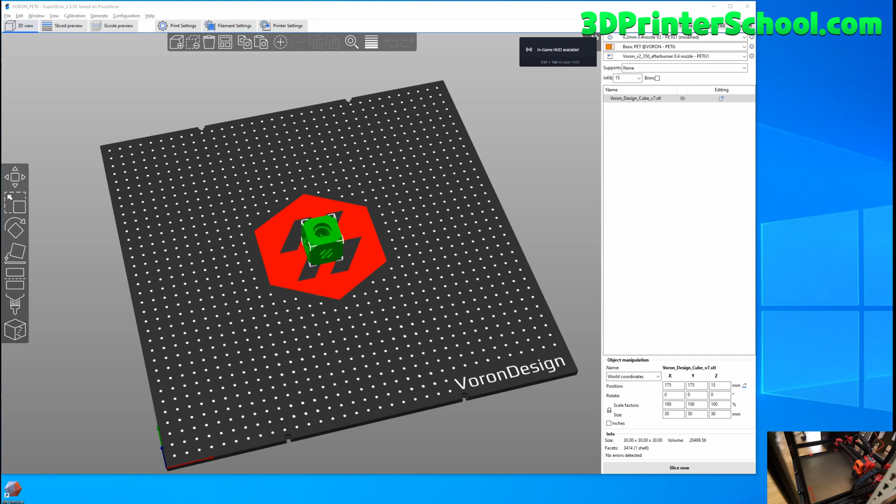Hi guys, so we're going to go ahead and print our very first object. We're going to do the Voron Test Cube here. I'm going to be using PETG for this.

Let me go ahead and share some of my settings. I did share with you guys my Printer.cfg settings. Let me go find my printer. I've switched to a new office, so my IP address has changed. This is the local IP address, by the way. I can also access it using Voron2.local. My router at this new office supports that, but maybe it's not working. It's okay, it doesn't matter.

So I've got Mainsail up. Last time I showed you how to set up Printer.cfg. Now this is just my method. I'm not saying it's the best out there that you can follow on the internet, but I've just been putting pieces together myself and it's been working for me. Let me go over some of the stuff.

So your serial, this is how you connect to your board. These are extra temperature sensors I added, Raspberry Pi, Octopus, and then the enclosure section, so you can comment the enclosure part out if you don't use an enclosure.

Core XY, 300 max velocity. I would recommend setting this lower if this is your first time. I get pretty good results at 8,000 and 4,000. I'm not trying to break the world record for the fastest Voron. Things move fast and they're eventually going to break down, so I don't run it that fast. I run it just at medium speeds for right now.

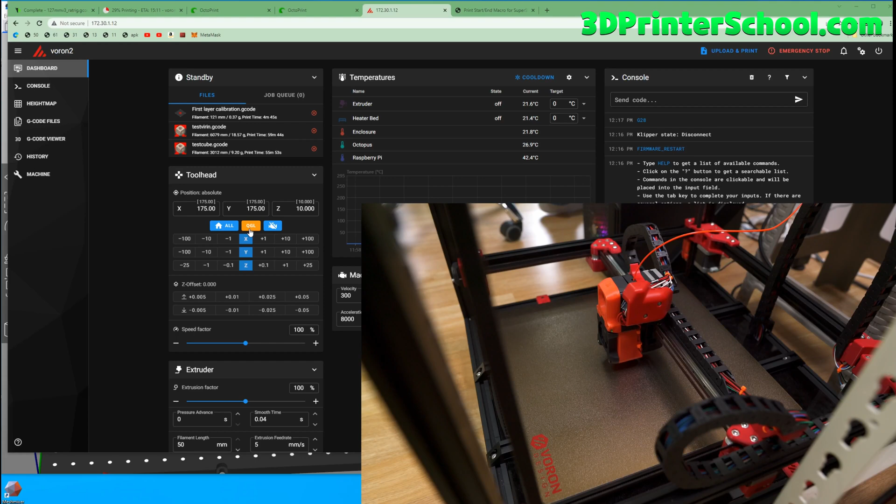Let's home it real quick, and let's do quad gantry level real quick. Now make sure your nozzle is clean—we're going to do first layer calibration, layer height.

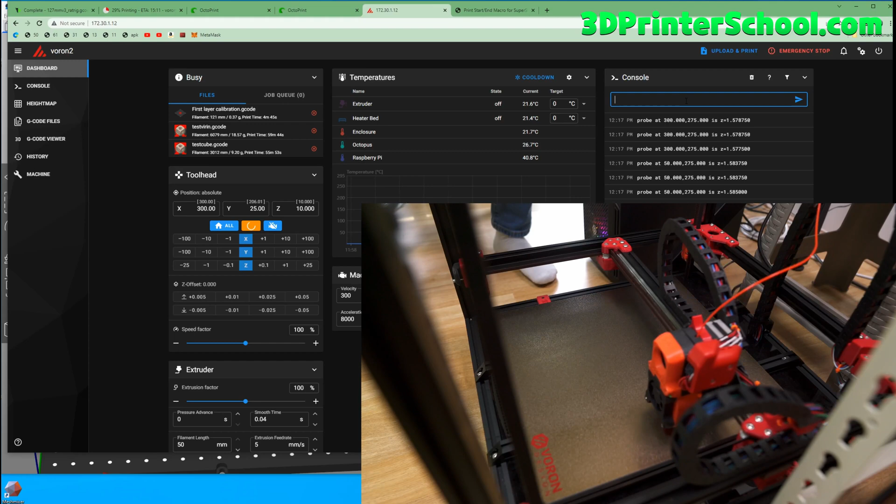The command is going to be probe_calibrate. I'm going to go ahead and check my machine here and make sure there's a little bit of nozzle residue. When you do the first layer probe calibration, you want to make sure there's nothing there. You don't really have to do quad gantry level, but I guess it's better to do it.

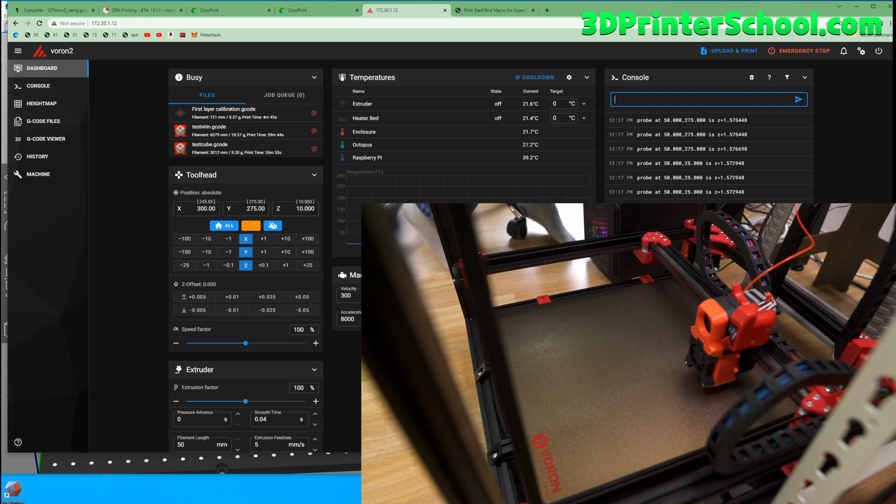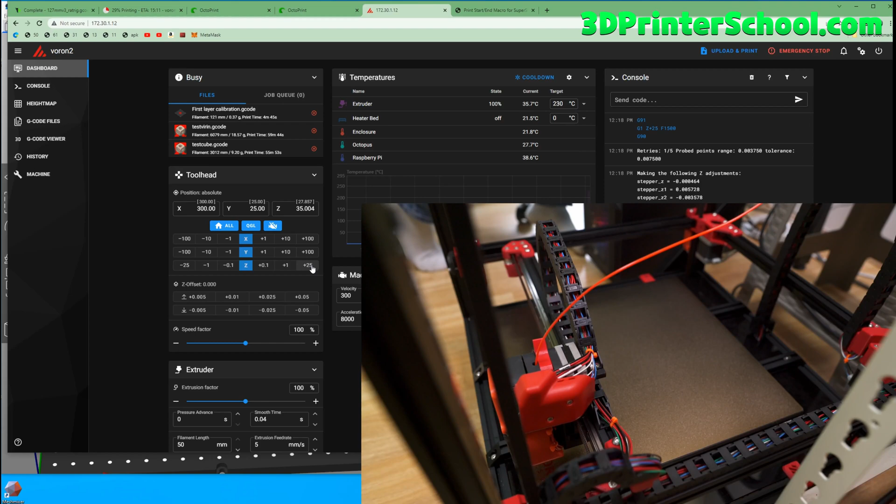Okay, as it heats up, I'm going to go ahead and remove some of this stuff—remove the extra filament. As soon as I remove it, another important thing, I'm going to bring the temperature back down to 150. That way there's nothing coming out. Make sure your nozzle is clean, otherwise your first layer calibration is going to be off.

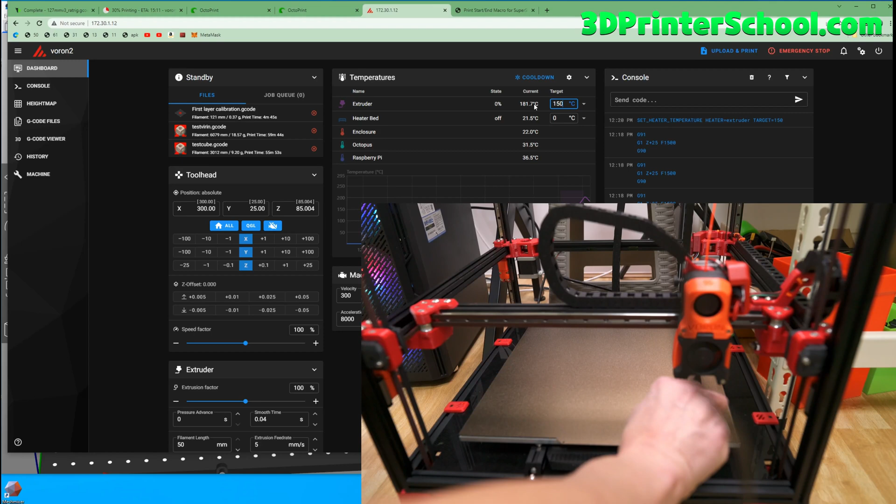So while it's cooling down, I'm going to go ahead and take my pliers and remove that extra filament. I didn't have to reach full 230 degrees—it is completely clean now. We're going to center it again.

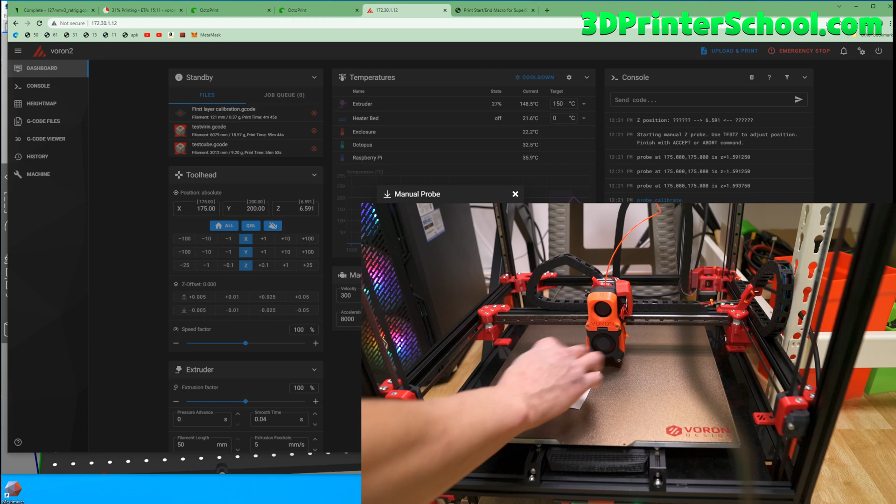You can do this cold—Klipper will actually adjust automatically for it. So once you center it, you're going to do probe_calibrate, and this is going to set it about 5 millimeters above the bed, bringing up this little adjustment prompt. What you're going to do is put a piece of paper under it. Just watch it carefully, it's like about 5 millimeters—keep watching the nozzle and make sure it doesn't hit the bed.

I'm going to go down: -1, 2, 3, 4, 5. Okay, now -0.5: 1, 2, 3—no, it's got to go further, 1, 2, 3, 2, 1. Oh, almost there, 1 more. Okay, it's getting there, I'm going to go a little bit slower—get it until it gets stuck, slightly stuck. Yep.

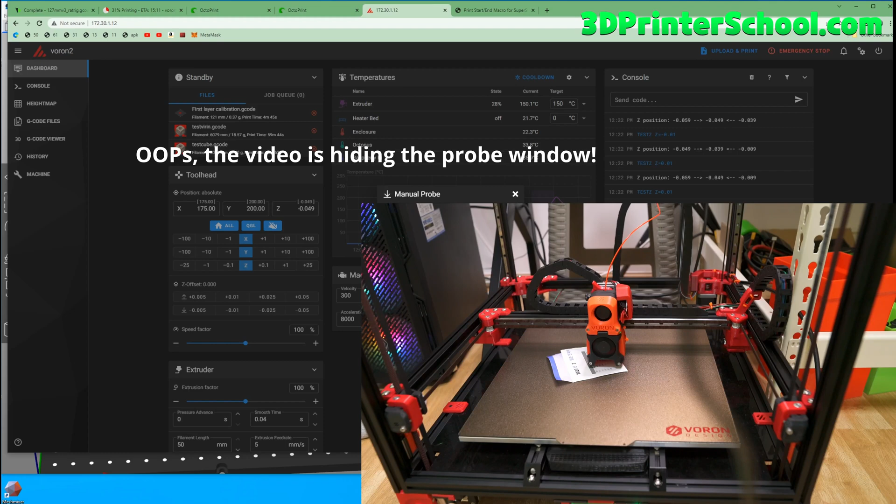Okay, it's now scraping the paper. Maybe go just get it above just a little bit. So I'm gonna go at 0.01. And that feels really good. That's too loose. So I got it to a point where it's loose, but you could clearly feel a slight tug of the paper. Yeah, that's perfect, I think.

You should be able to get a piece of paper through, but you should feel just a tiny bit of resistance. That's perfectly level. You're gonna hit accept and hit the save config button, or you can type save underscore config. This will save your new Z offset location.

You can also adjust the Z offset here while the printer is running, under Z offset. So let's say, a lot of times I'll actually fine tune it. I'll add like 0.005, adjust it, and then save, and then make sure you save config after it prints.

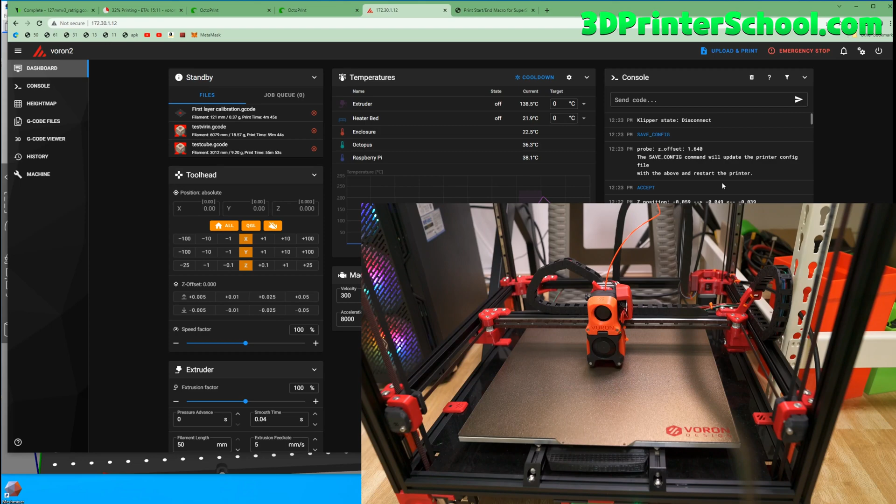So the next thing you'll need to do is load up SuperSlicer or Prusa Slicer. Now, if you're following my guide, you'll need to insert the G code here. You can go to 3dprinterschool.com, and there should be a section called Print School. I'll have a link to this. Just copy and paste this. This is what I use, okay, and it works. I'll walk you through, and there is also an end section. I know a lot of people have been asking me for this, so it's all available on my site.

I'm using a filament sensor, not on this one, but my other printer. But you can just comment this out if you're not using it. It's not gonna affect anything if you leave it on, so I'm just gonna leave it. Wait for the enclosure to reach 37 degrees. I use this when I print ABS. I have an extra thermistor. Now you'll need to install an extra thermistor if you want to do this.

It's going to home all axis, G28, quad gantry level. It's going to level your bed. It's going to do a bed mesh, 7x7 for mine, and then it's gonna load. Make sure you load after you do the bed mesh, otherwise it's not gonna do anything.

Oh, I forgot all this stuff. Before all that, it's gonna set your bed temperature to your final bed temperature. For example, I'm printing right now PETG, so it's gonna be like 95. And then also it's gonna set the temperature of your nozzle to 150, so it doesn't ooze while you're homing, but it's still hot enough.

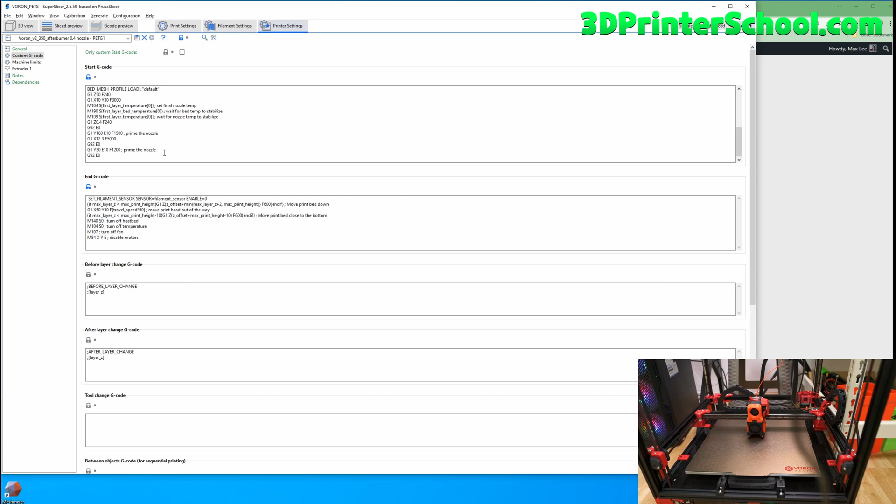As far as my filament settings for PETG, it's gonna be like that: 235, 95, cooling 20, 120. This is just default settings I got from basic PETG on Voron. It works fine. Custom G code. Make sure you go in filament override, make sure nothing's overridden. Sometimes this does by default and messes things up.

Extruder, this is kind of important. I just set retraction to 0.5 for PETG. Retract on layer change. Alright, print settings.

These are my print settings. I'm gonna have 5 perimeters, 5 on the top, 2 on the bottom, just for this. I like doing avoid crossing perimeters. That really gets rid of a lot of the ooze. It keeps it inside the object instead of bringing it to the outside.

Seam, I have it on custom there. Arachne, make sure you enable Arachne. Slicing, I'm printing at 0.2 millimeter layer height, right? Infill, 15% at rectilinear. New skirts. I have a skirt. I like to keep the skirt kind of far away from the object so it doesn't sometimes get in. Width, I've got it set just like that right now.

I like to set infill a little bit thicker and then perimeter a little bit less thick for bed adhesion, better layer adhesion, which I find works. First layer can be like 0.5, I think, a little bit thicker. Okay, that's pretty much it.

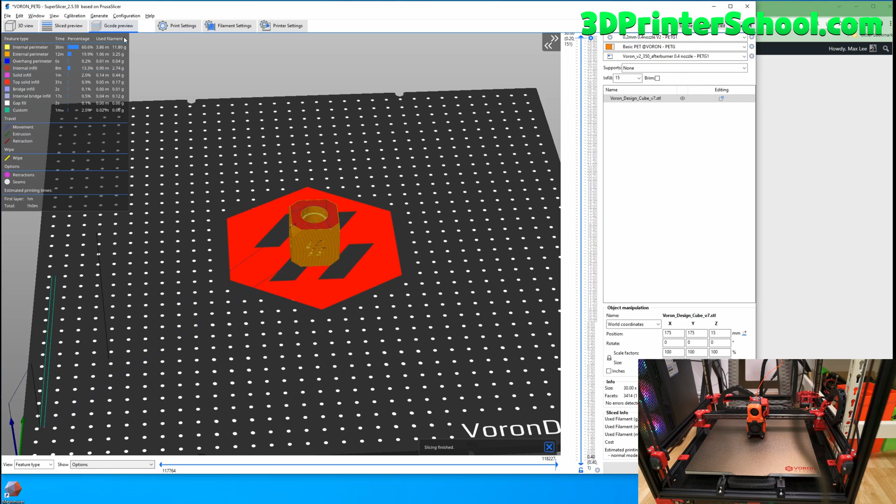And I'm gonna bring up the cube and slice it. Oh, it's already sliced. And it's gonna basically look like that. And you can go ahead and enable travel, wipe, retraction, and seam. And where the seam goes is sort of important. You see the blue lines, that's all my travels. That's because I avoided crossing perimeters. This way it doesn't cross in the middle and cause all kinds of blobs and whatnot.

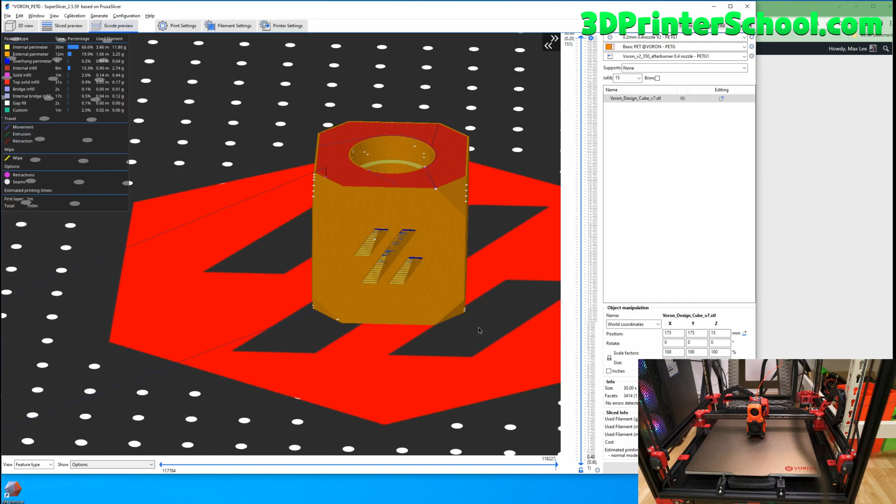So all the retraction is gonna be on these corners, I think. I think it'll be okay. There's an overhang test there. We're ready to go.

It's gonna take about an hour. Oh, my print speeds, I forgot to show you. These are my print speeds. It's pretty much default, other than some of these other settings I've accelerated.

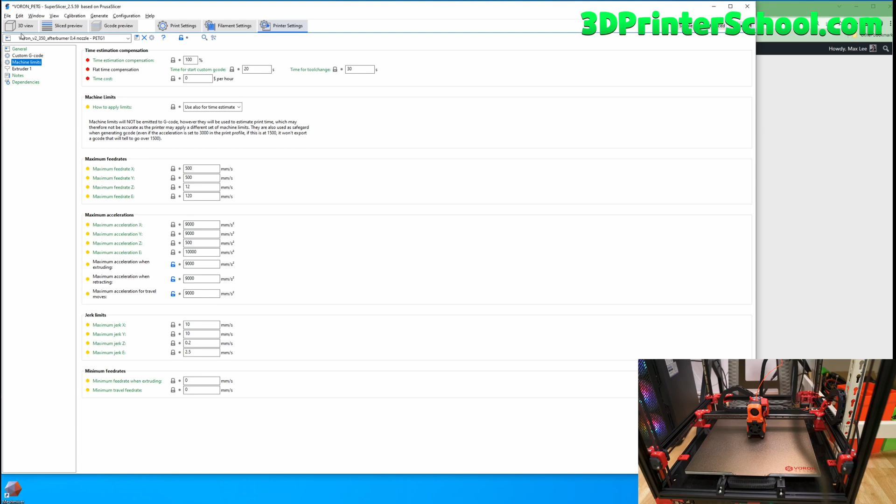Also, let me show you the machine limits under printer settings. I increased just acceleration, but that's my default there. You can just copy and paste it if you want. But this is like kind of medium speed, not fast, not slow.

So I'm gonna do the Voron Cube test. And that's gonna save it. And I'm gonna go ahead and go to my new Voron here, Voron Cube test. Open. And we'll let these guys run.

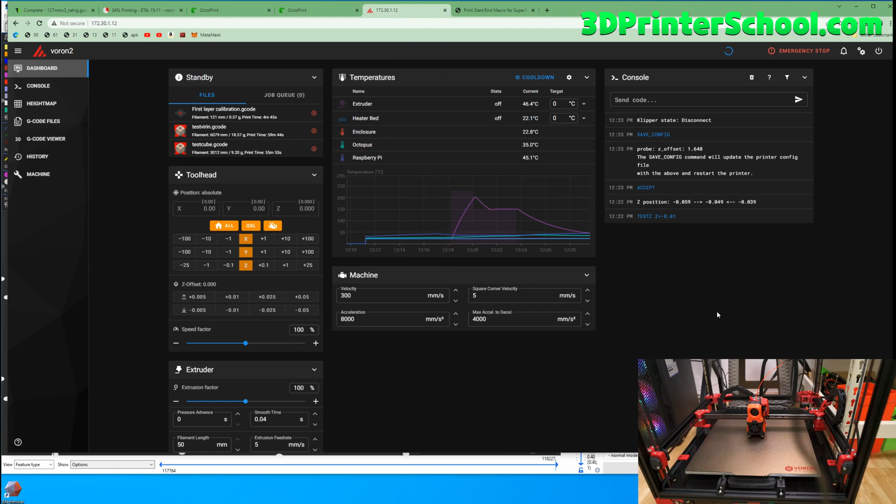Upload successful. It's gonna start heating up the bed. And I'll go ahead and let you guys watch like this. Probably better like this. Temperatures.

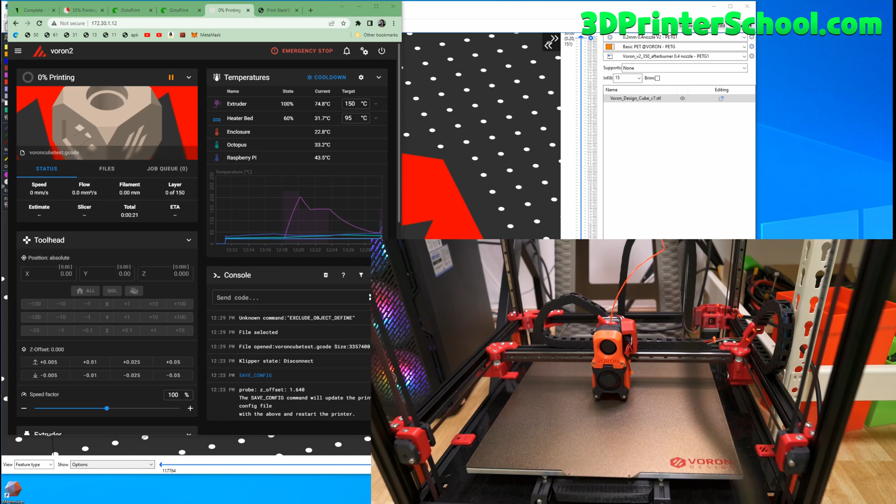Okay, there, you can see my printer. I'm gonna go ride my electric skateboard because it's gonna take an hour. I don't really want to be around here. Sorry, I'm gonna go electric skateboard, but I'll put the microphone right by the printer so you can hear the sounds. It's gonna be interesting.

Is it gonna be interesting? Point my microphone towards the printer. There you go. You can hear it printing, can't you?

You can see that the extruder is heating up to 150 and it's waiting for the bed to go to 95. It's gonna home, it's gonna do quad gantry leveling, and it's gonna do the bed mesh, and then it's gonna increase the extruder to the final temp of 235, and then start printing.

Just make sure, if your first layer is not close enough for some reason, go ahead and adjust the Z offset. You can use 0.005 up or down. Make sure to do that on your first print. But if you did your first layer Z height adjustment correctly like I did, you should not have to. We'll see.

Sorry guys, I ran out of battery on my camera, but I had to charge it while it was warming up the bed. It wasn't doing anything anyway.

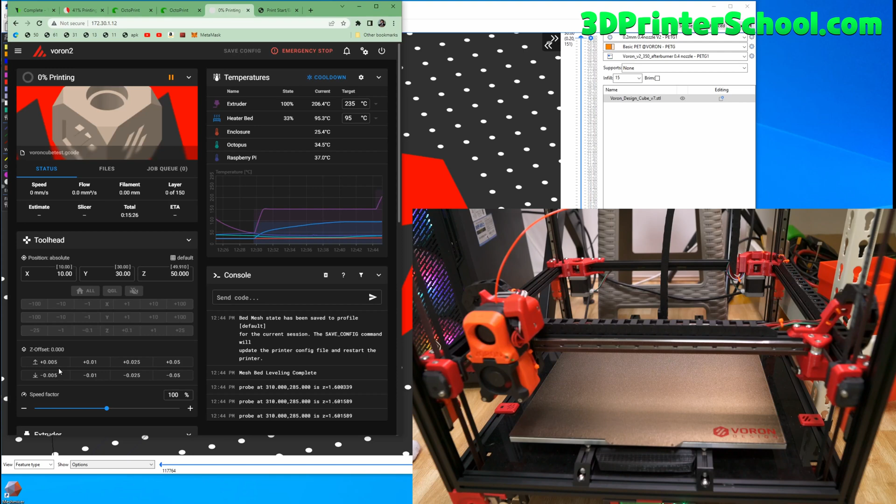As soon as it reaches that temperature, it will lower itself and start printing. But be ready to change the Z offset, since it's your first time, so I'm going to be ready for that. But I'm nearly 99% positive it's a perfect layer height, since I adjusted it, I think. So we'll see if that works out.

Oh shoot, I've run out of battery on my stupid camera here. Oh god, I'm gonna have to wait a little bit because it's charging and it keeps running out of battery.

Ooh, let me grab another camera. Yeah, I have another camera. Oh god, okay, let me hook up this other camera. So it just lowered itself, and now it's doing the first layer.

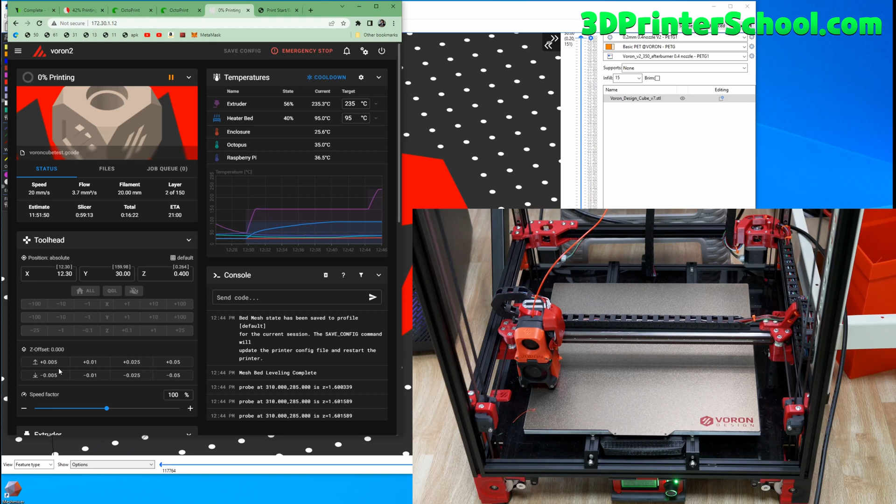Let me see, it seems okay. Maybe a little high. Oh, it's definitely high, so I'm gonna lower it a little bit, maybe minus 0.01.

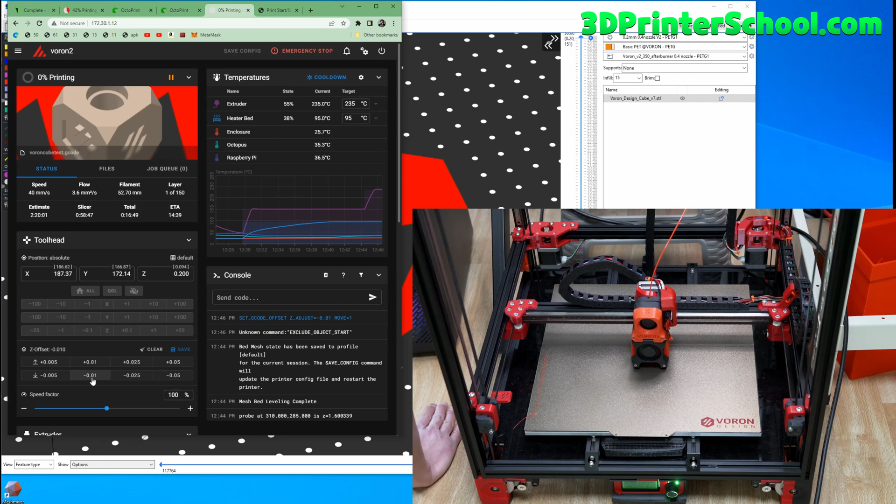Kind of hard to see, you gotta really get down to it. Okay, let me see, yeah, that seems okay. Seems a tiny bit high.

It's PETG, so it's not gonna warp anything, so it stays on pretty good. Good thing I grabbed my extra camera, otherwise we're gonna miss this action.

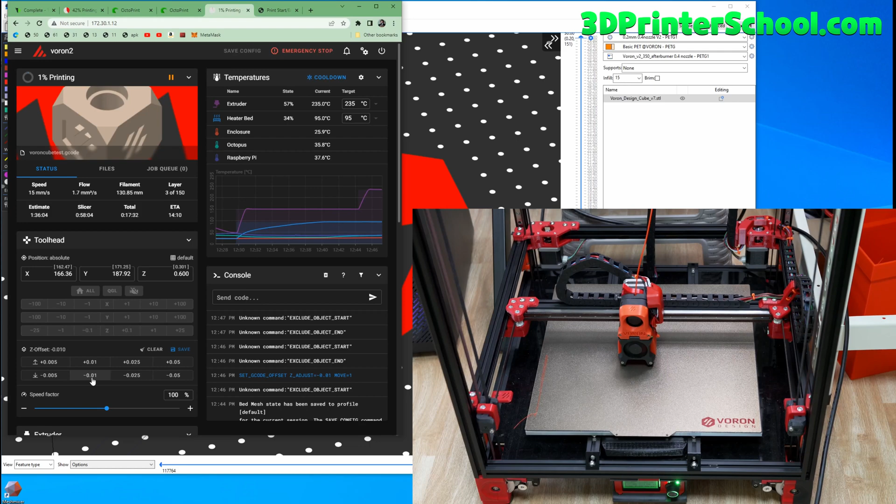Okay, I gotta go eat some lunch. I'm gonna let this run. I will be back when this is done. Close up - this is the first print with this new printer. Hopefully it works out.

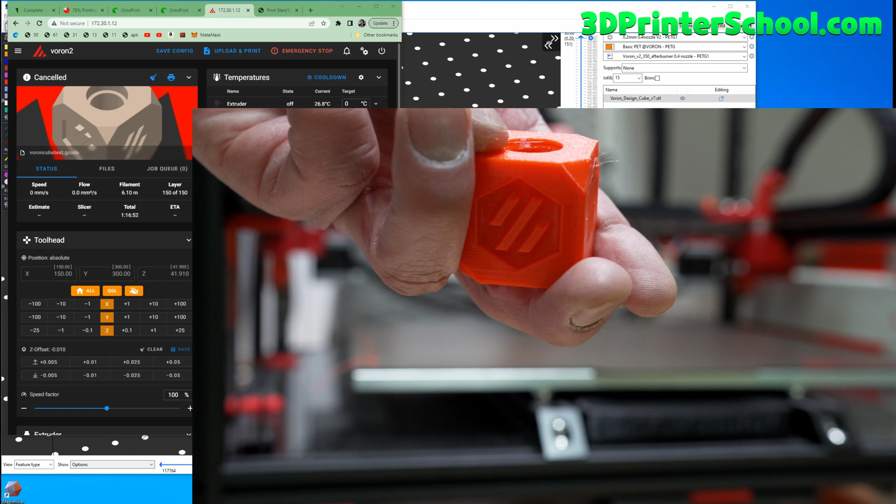Hi guys, it's finally done. Oh, stuck there pretty good. Let me try to give you a close-up. So the bottom layer seems to be pretty good. I did lower it 0.01. Taking a look here, looks pretty fantastic.

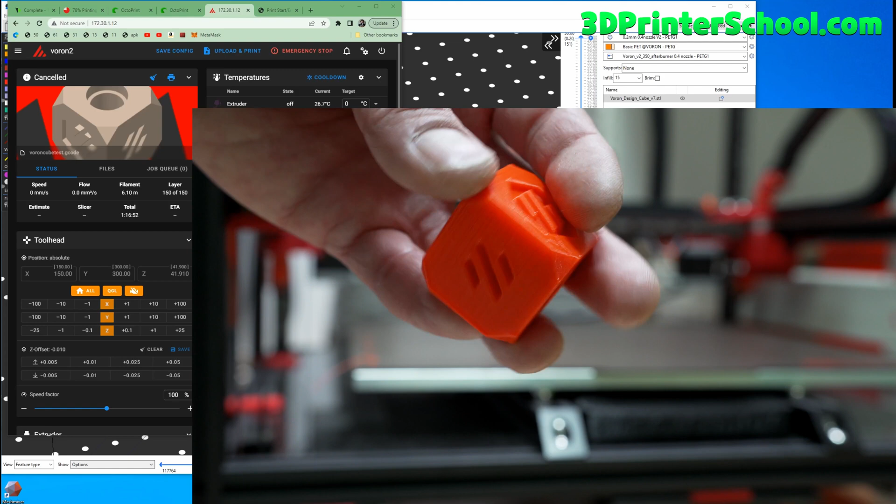There seems to be a little ringing, which obviously I need to do some tuning with pressure advance and also input shaper for. But you can see the top did the bridging really well, and the bottom overhang came out really good. So overall, very good quality - not too bad. The X is a little iffy, but very satisfactory and a very good first print.

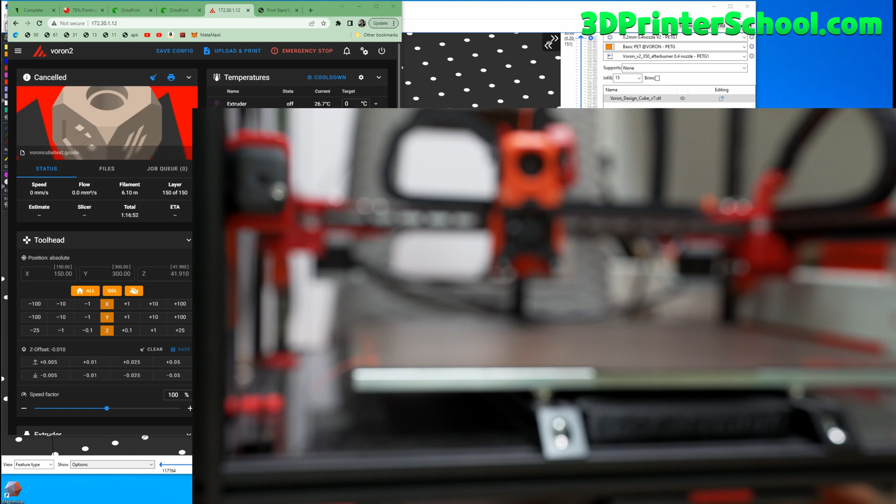Hey guys, I'll have more videos. For right now, I'm very satisfied. I'm gonna probably install the enclosure next because I want to have it in a closed environment.

Also, I'm gonna start printing some TPU. I need to actually print a bunch of TPU. I want to upgrade to the Stealthburner, but yeah, not sure yet. Overall, pretty satisfactory, so we'll see. Have a great day, and good luck on your Voron 2.4.